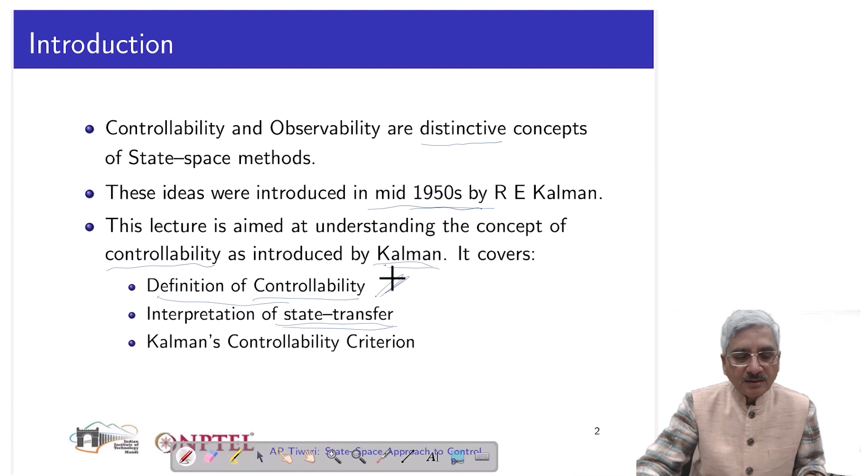Today's lecture is aimed at understanding the concept of controllability as introduced by Kalman. In this lecture, we will cover the definition of the controllability, how it is defined, the interpretation of state transfer, because we will see that the definition of controllability involves state transfer. So we have to do some interpretations about the state transfer and the Kalman controllability criterion. Let us proceed ahead. We begin with the definition of controllability.

A system described by the state equation x dot(t) = A(t)x(t) + B(t)u(t) is said to be controllable if and only if it is possible by means of the input to transfer it from any initial state x(t0) to any terminal state x(tf) at time tf within a finite time of tf minus t0.

Now, first of all, this definition involves the matrices A(t), B(t). That means we are discussing the linear general case, the time varying case. The controllability applies to linear systems, time varying in general, time invariant also, as we will see. So it is specific to linear time varying systems and it doesn't apply to nonlinear systems. We should keep it in mind.

The other thing is that these particular words, any initial state, the sense of any here is all. In the state space, the system can be at any particular coordinates at the given time t0. So the state transfer has to happen from any of those various points in the state space which exist. So this any means all. Anything one thinks of, that can be the initial state. Similarly, the terminal state x(tf) can also be any point, any coordinate in the state space.

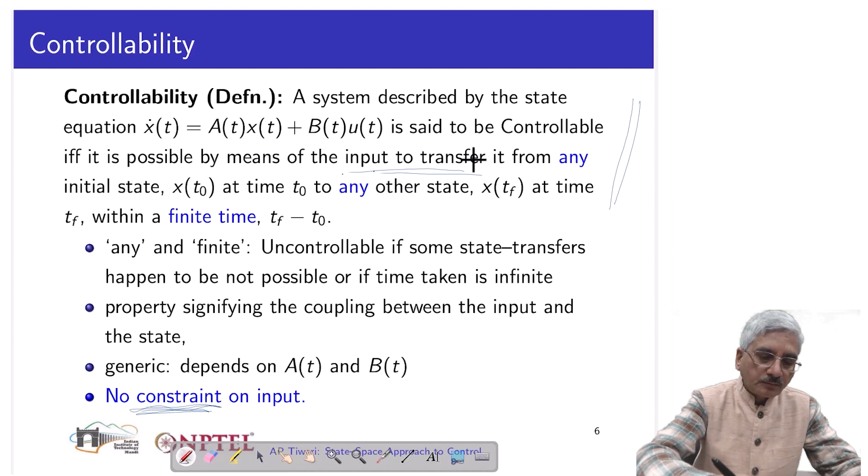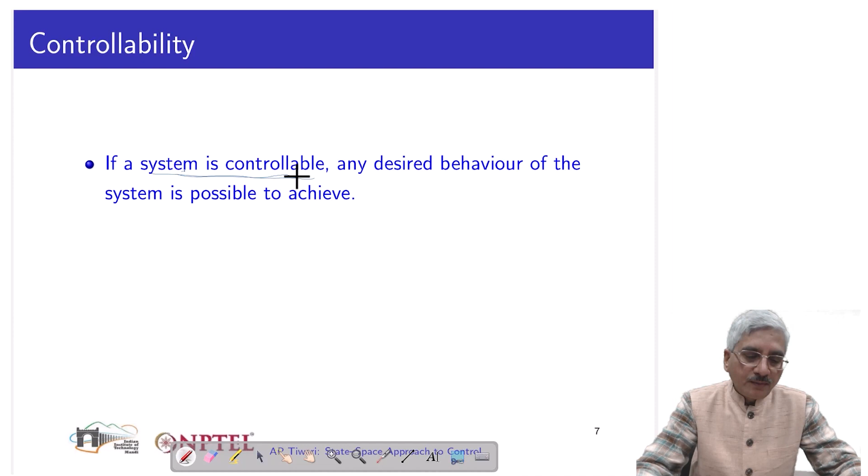If a system is controllable, what is the benefit? We will see subsequently the controls can be designed to meet all the various kinds of specifications only if the system is controllable. So it's a kind of guarantee that by applying particular type of input, a desired behavior from the system can be achieved. So it is a useful property which is required for design of controllers for the system.

If the system turns out to be uncontrollable, let us say some state transfers are not possible to achieve by application of input. There are some combinations of initial conditions and terminal states for which the state transfers will not be possible, then the system will of course be uncontrollable. But does it mean that the given dynamical system is a useless system? Should it be discarded? These kind of questions may arise.

And the obvious answer to this is that yes, the system may not perform in the desired manner, but it may not be useless. It may still meet some of the performance specifications. There may be some limitations on its performance, but it's not true that uncontrollable systems are useless systems. They may still be quite useful.

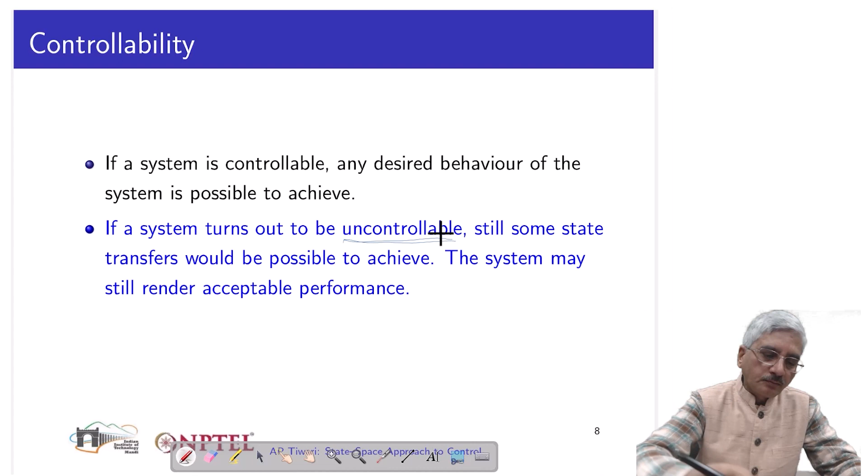Now, the definition of controllability involved the phrase state transfer, and we will interpret this phrase a little elaborately. So we are given the system x dot(t) = A(t)x(t) + B(t)u(t), and the initial condition is specified as x(t0) at time t = t0. Now we have solved this state equation in some earlier lessons, and we see that the solution of the state is given by this expression.

x(t) is the state transition matrix evaluated between t and t0 pre-multiplied to x(t0). This is the zero input response plus the zero state response, which is given by the integral of the state transition matrix evaluated between t and tau multiplied with B(tau), multiplied with u(tau), integrated from t0 to t with respect to tau. So the state at any time is the summation of the zero input response and the zero state response.

Now, at the terminal time t = tf, the state x(tf) can be given like this. We have substituted tf in place of t everywhere, and we get this expression. Now let us say by coincidence it so happens that the desired terminal state is exactly equal to the zero input response of the system at time tf. Suppose the specification is this, then obviously we see that this lies on the natural trajectory.

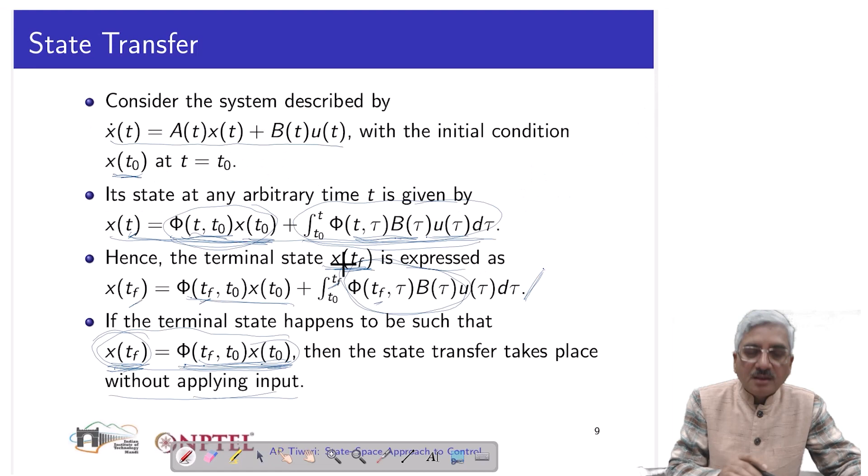What we mean is that the system state x(t0) was here in the state space. This is x(tf), let us say, and this has to be achieved. So from this, one component is coming from the zero input response, the natural response of the system, and the remaining has to be supplied by application of the input. So as we saw in that integral, this contains the product phi into B, and the input reaches the component of x(tf) through the product phi(t, tau) B(tau).

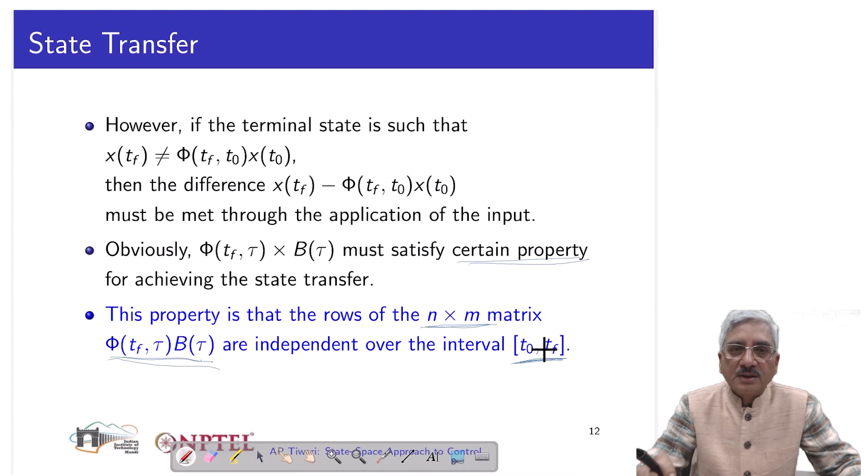So what it means is that this phi(t, tau) B(tau) should have a certain property, and that property is that the rows of this n by m matrix phi(t, tau) B(tau) should be independent over the given time interval t0 to tf, both ends inclusive. If these rows are independent, then the input will be able to contribute to the desired terminal state of the system, and this independence is given by this n by n matrix denoted by W, evaluated between t0 and tf. It is given by this integral, and it is called the controllability Gramian.

It looks difficult but is easy to remember, because this is phi into B and this is the transpose of it, phi B into transpose of phi B, which becomes phi B B transpose phi transpose, integrated with respect to tau between the limits t0 to tf. So the state transition matrix pre-multiplied with the input matrix, multiplied by the transpose of the input matrix and the transpose of the state transition matrix, integrated between t0 to tf, gives the controllability Gramian matrix W.

And if this matrix is non-singular, then the system will be controllable and all the state transfers will be possible. Nothing will be left. Any initial state to any final state, the state transfer will be possible within the interval t0 to tf. Any t0 and any tf, any x(t0) and any x(tf). The time can be small, the time can be large, but the interval t0 to tf will be finite. This will be possible, and it also gives a way to find what that input can be.

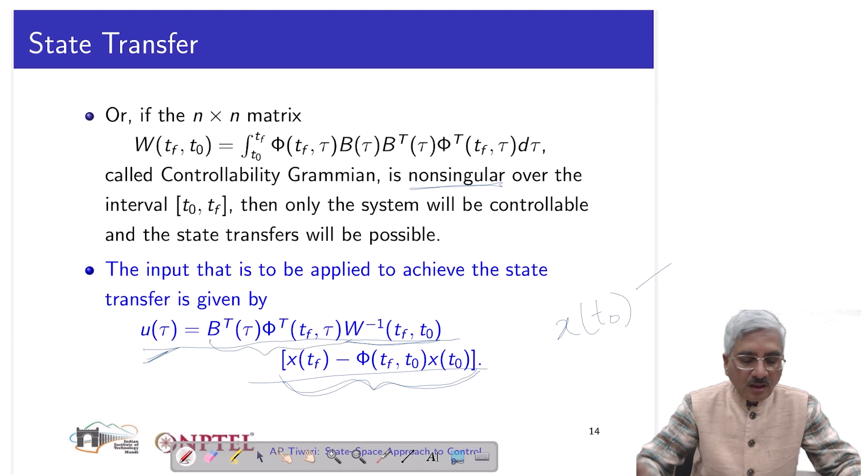Now we see what happens in the case of a linear time invariant system. The state transition matrix is given by the matrix exponential: phi(t, tau) is e^(A(t minus tau)), phi(tf, tau) is e^(A(tf minus tau)). So in the controllability Gramian, in place of phi we get this matrix exponential, and it gets further simplified: integral from 0 to tf minus t0 of e^(A tau) B B transpose e^(A transpose tau) d tau. This becomes the matrix W for linear time invariant systems.

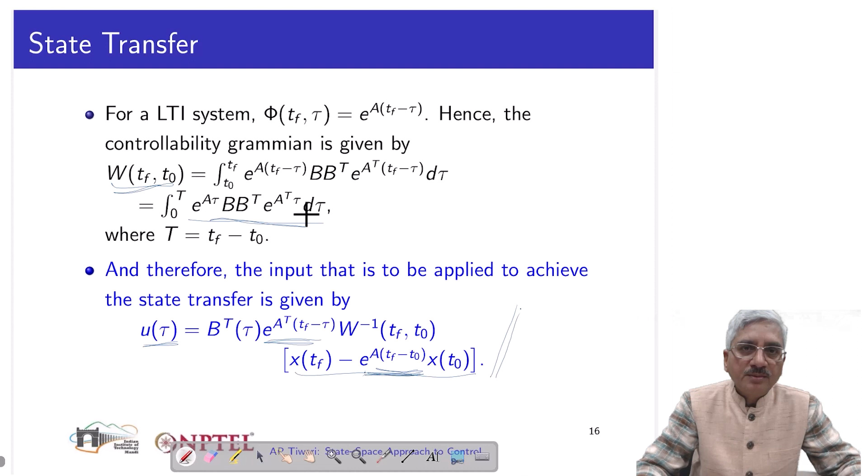And of course, the input accordingly becomes like this. In place of phi, we have the matrix exponential e^(A(t minus tau)) and its transpose. Using this formula, the input can be calculated. Using this formula, the matrix W, the controllability Gramian, can be calculated, and then the input for the state transfer can be determined for the given x(t0) to given x(tf) in the given time t0 to tf. We see this with the help of one example.

So t0 is 0, tf is 2, and this is x0, x(t0), and this is x(tf). So we have to calculate, and of course it is very clear from the question that this system is controllable. That is why it is asking for the input which can be applied to transfer the system. Nevertheless, we will evaluate W and we will check whether it is non-singular or not.

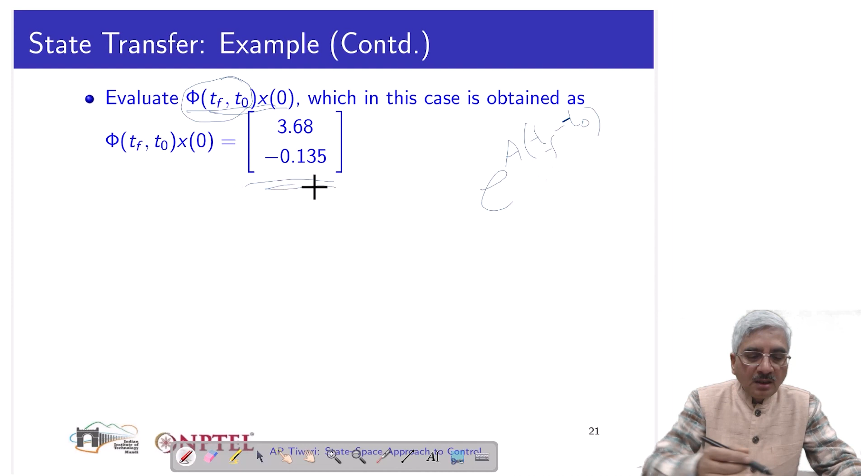(tf, t0) x0. Of course phi has to be evaluated using the matrix exponential e power A(tf minus t0). tf is 2 and t0 is 0, so e power 2A. We are given A, so phi(tf, t0) can be evaluated. Multiply that by x0 and we get this. So the input u(t) will be given by, this is x0, this is phi(tf, t0) x0, and this is x(tf), the final value. W inverse we have calculated.

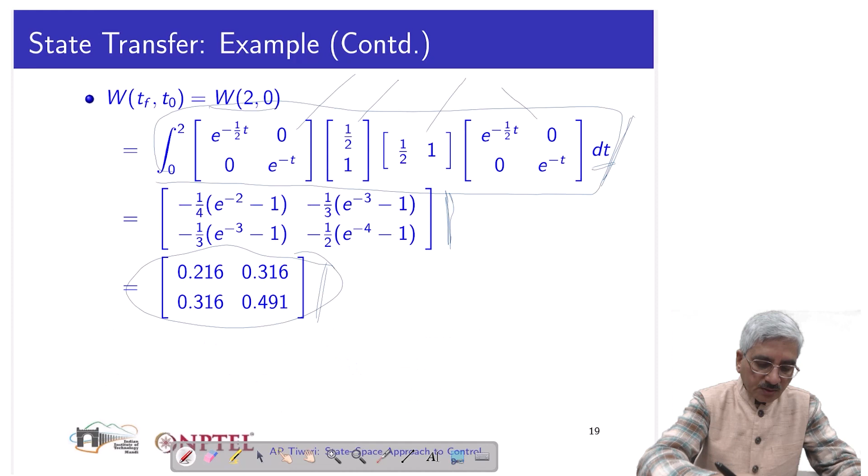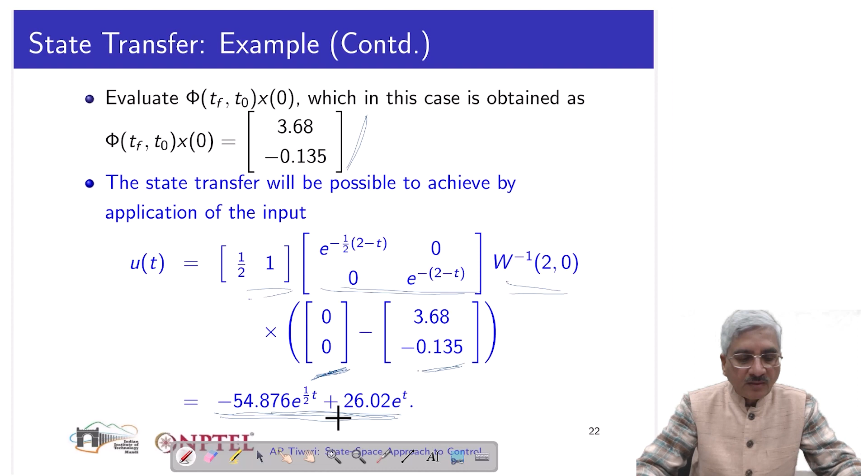First of all, it has to be shown that the system is controllable by calculating W and the inverse of W, and then the input u(t) has to be evaluated, which will achieve this state transfer. So you can sharpen your mind by trying to solve this example using the concepts presented so far.

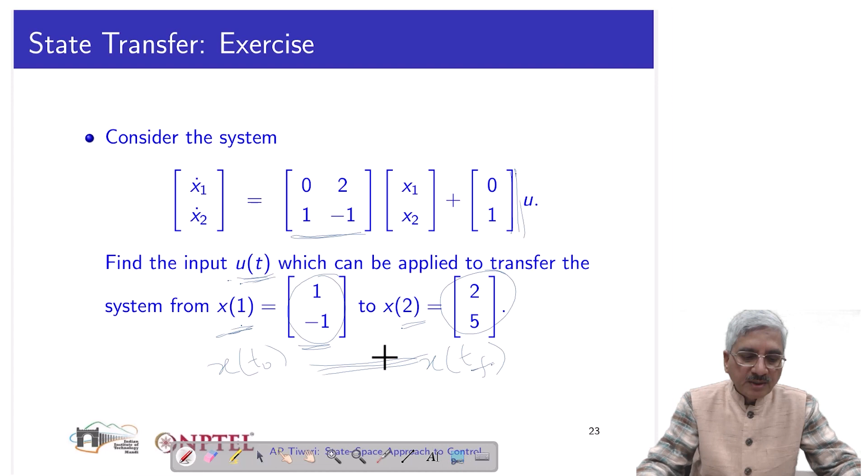We summarize. Controllability is an important property for controller design for linear dynamic systems. Kalman's controllability criterion based on the rank of the controllability Gramian is useful for testing controllability of various types of systems, time varying as well as linear time invariant. Of course, only linear systems. And over and above that, it gives a method for determining the input required for achieving the required state transfer.

So it determines the controllability. Once the controllability is established, the answer to state transfer is yes. All the state transfers will be possible, and it gives the expression for determining the input over the interval t0 to tf, initial time to final time.